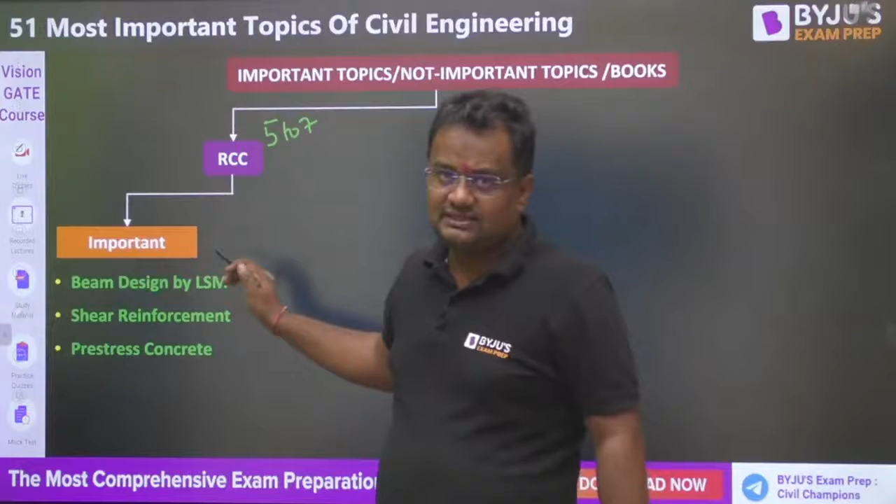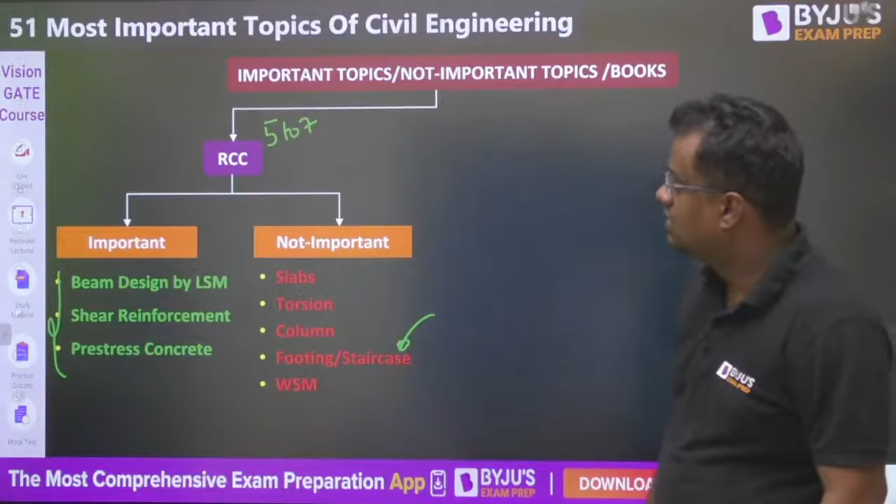Beam design, shear reinforcement and pre-stress. From last 12 years I have analyzed, the maximum number of times the question have been asked from these three. The topics which you can skip are slab, torsion, columns, footing and staircases, anyhow coming in engineering services mainly, and working stress method. Book you can refer is Pillai Menon.

For steel structures, the important topics are plastic analysis and connections. 70% chances that the question, if asked in steel structures, which is around 2 to 4 marks, will be coming from plastic and connections. Compression members and beams, chances are less, particularly in GATE exam. The book is none other than S.K. Duggal.

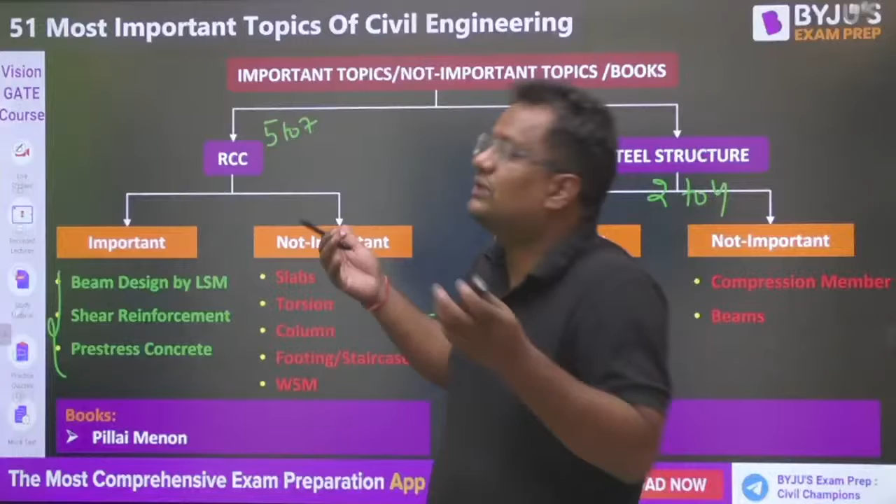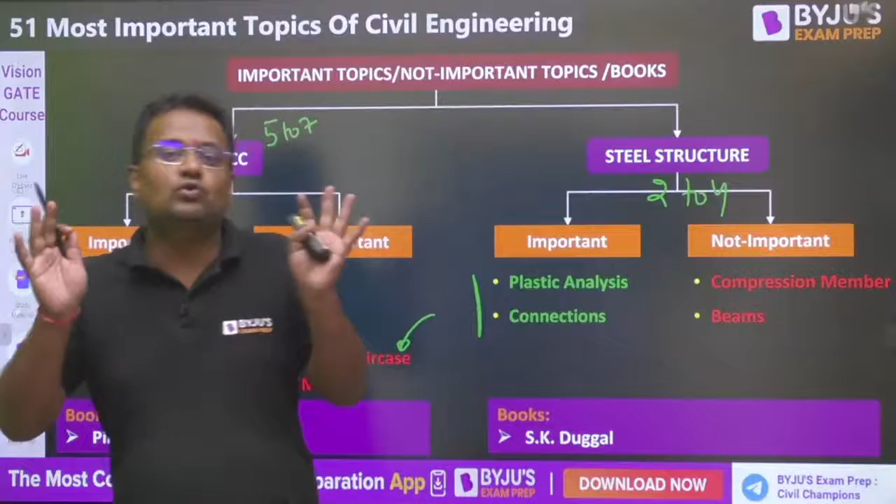Let me tell you, what is the benefit of this session, the important and not important topics. The benefit for two different types of students is different. First type, those students who have covered everything, who have completed almost their syllabus, they can focus more here. As they have studied all the syllabus, they have to focus here also, but they can focus more here, more practice, more revision here.

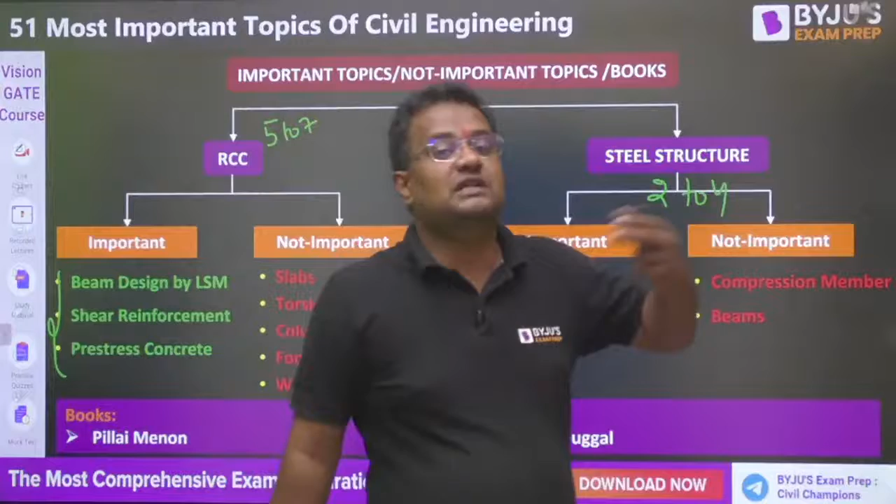Those students who are about to skip some topics or subjects can rely on the particular topics only. So for two different types of students, this can work differently.

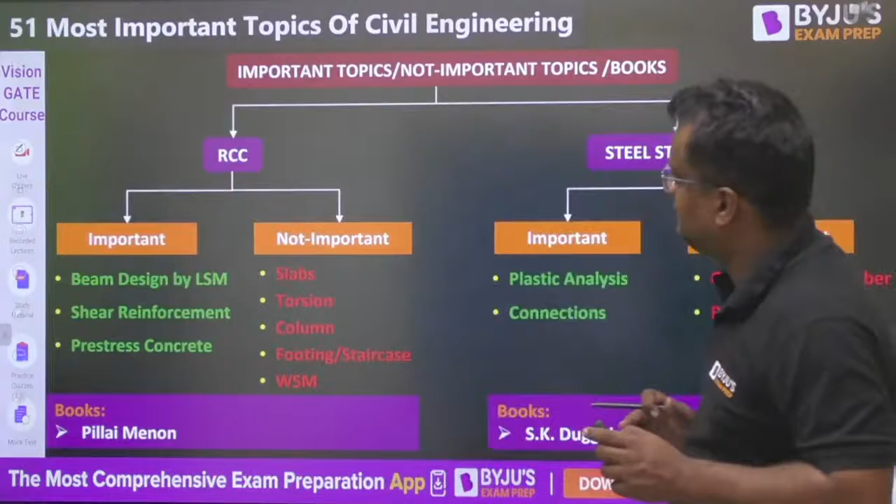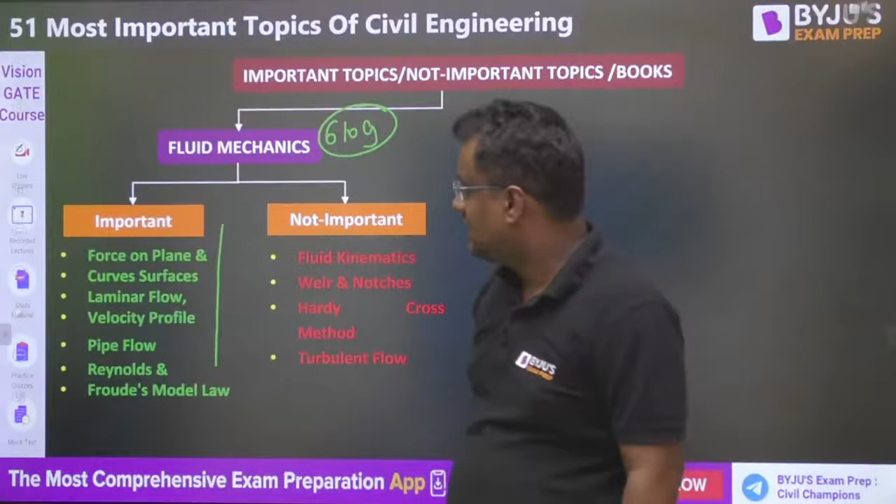Now guys, RCC and steel we have done. For fluid mechanics in civil engineering, it's around 6 to 9 marks including OCF, where OCF is around 3 to 4 marks and fluid mechanics is around 4 to 5 marks. Important topics are force on plane and curved surfaces, laminar flow, pipe flow, and Reynolds and Froude's model law, and the rest are not important. The book is Modi and Seth.

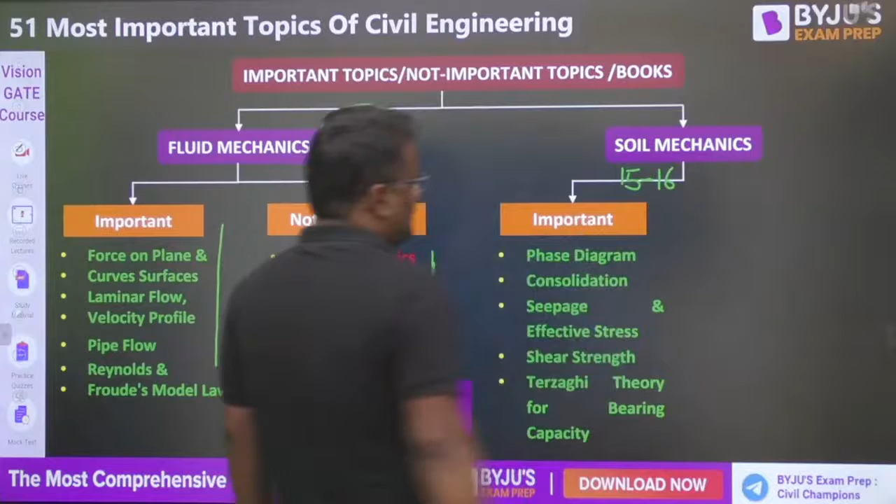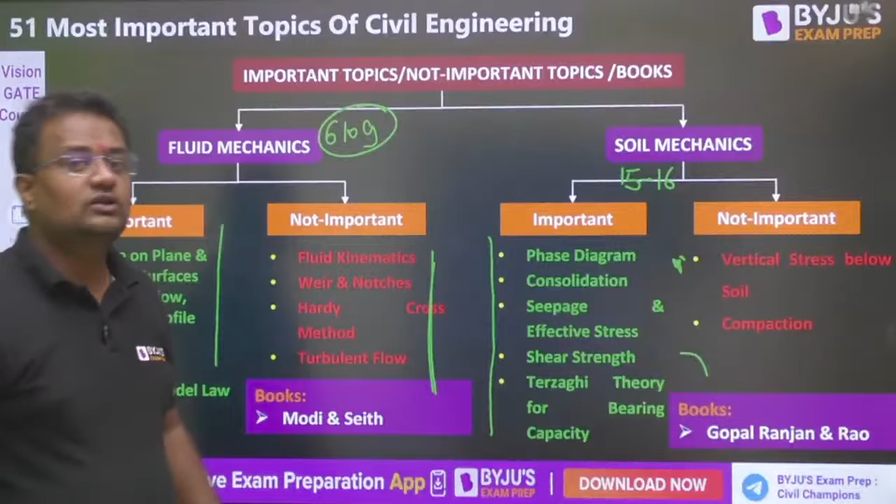For soil mechanics, which is the highest weightage of all civil engineering subjects, it is around 15 to 16 marks. The important topics are phase diagram, consolidation, seepage, effective stress, shear strength, Terzaghi, and bearing capacity for shallow foundation. Not important topics are vertical stress below soil, although in the last 3 years one question has been asked from this topic, and compaction - in the last 7 to 8 years they haven't asked questions from this. The best book is Gopal Ranjan Rao, because in many theoretical questions, particularly in Engineering Services and State Services examinations, the questions are direct copy-paste of Gopal Ranjan Rao's lines.

Now moving to highway engineering, which is part of transportation, coming around 9 marks, out of which 7 marks come from highway only. The important chapters are geometric design and traffic engineering. Pavement and hill roads are not that important.

Here the important topics are sight distance - SSD and OSD are equally important - super elevation, Webster method of signal design where C naught equals 1.5L plus 5 upon 1 minus Y, and capacity of highway for Greenshield's model, which assumes a linear relationship between velocity and density, that is VF into kj by 4. Not important topics are pavement design and length of vertical curve.

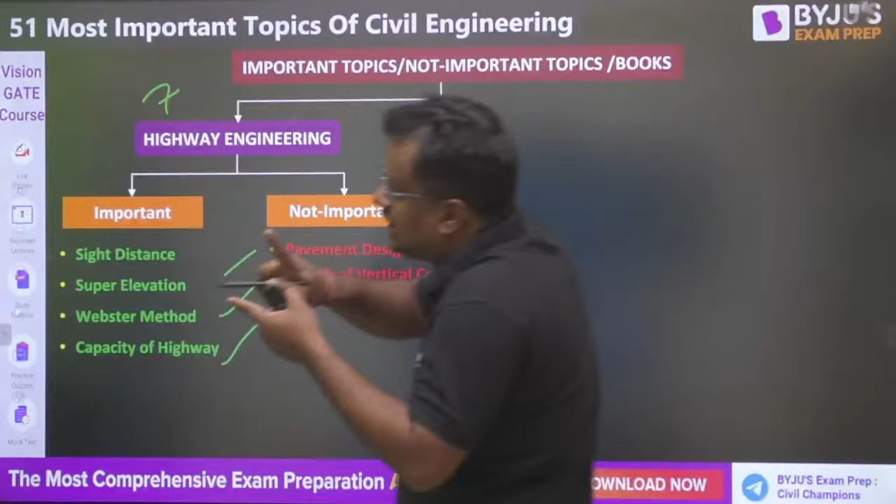From the geometric design chapter you expect a question from sight distance, you expect a question from super elevation, but compared to these, questions on vertical curve are less frequent and setback distance even lesser. Now guys, Khanna and Justo is the book.

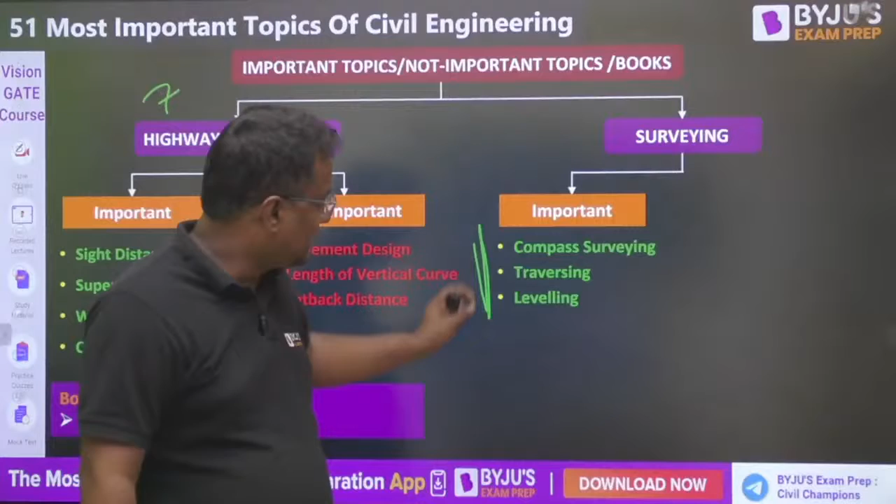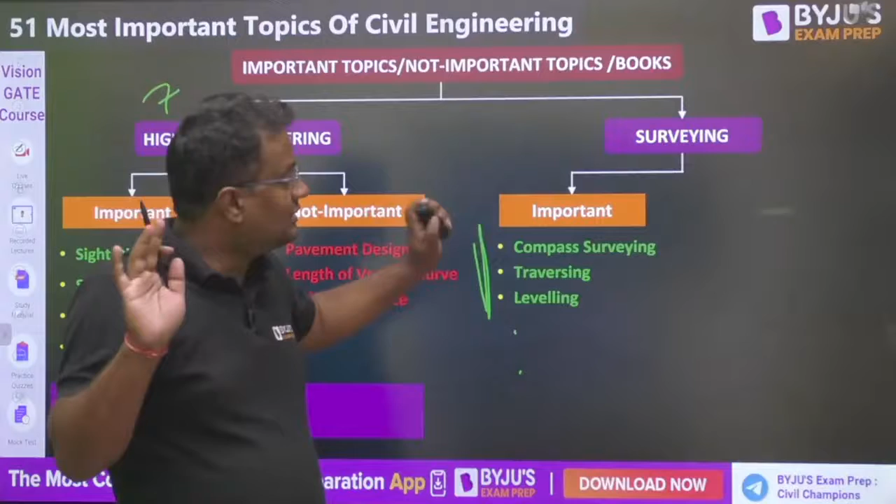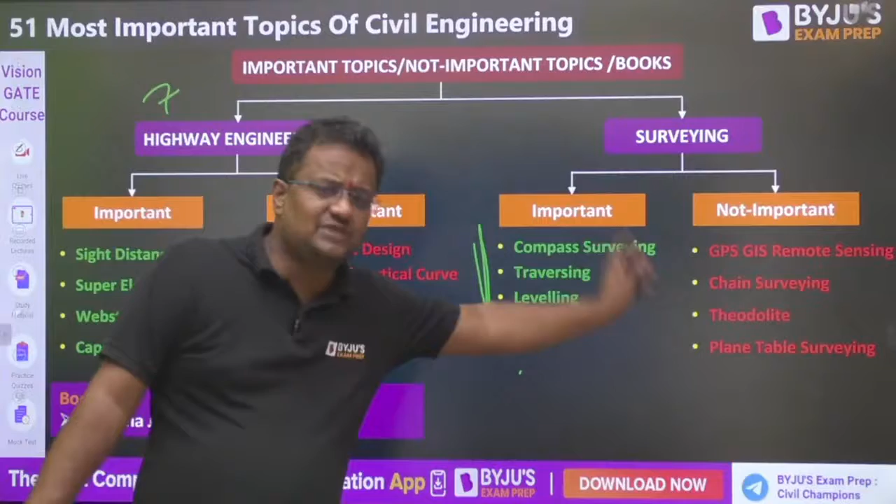For surveying, from these 3 topics - compass (declination and local attraction), traversing, and leveling - 90% of questions from last many years in surveying are coming. If I include photogrammetry and tachymetry, then it's around 99%. From all other topics, including chain surveying, rarely a question is asked. Chain surveying is asked in Engineering Services objective papers, but GATE is focusing on these only, and it's almost negligible from other topics. Surveying is very scoring, because in 5 to 6 days from zero level you can complete it, and it's worth around 5 to 6 marks in the GATE examination.

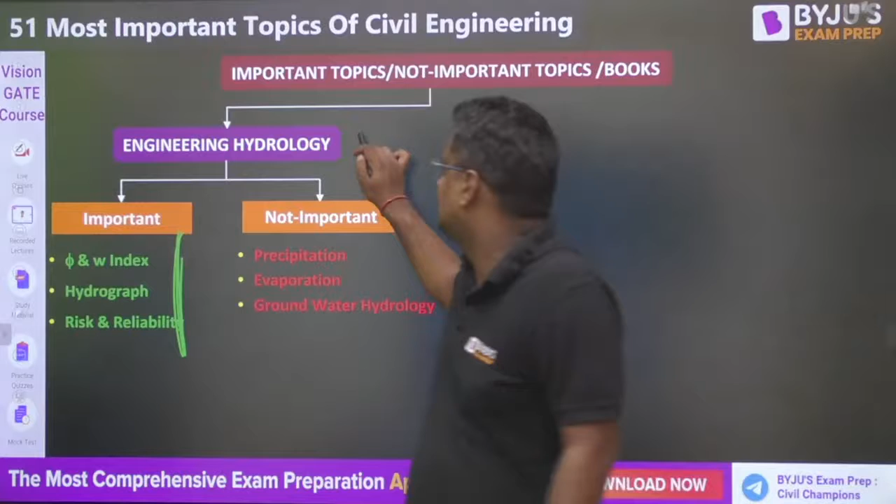Book is BC Punmia. Engineering hydrology guys, from these 3 topics - again like surveying, very reliant on these 3 topics for a question. Rarely in the last 5 years have you had a question outside of this. Precipitation and evaporation - hydrology is always around 4 marks, and I teach the hydrology syllabus this way, which is my own way of teaching.

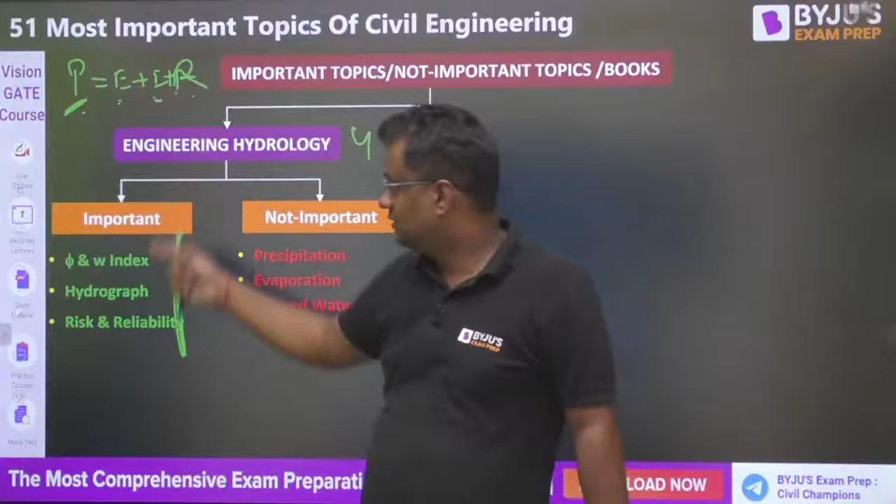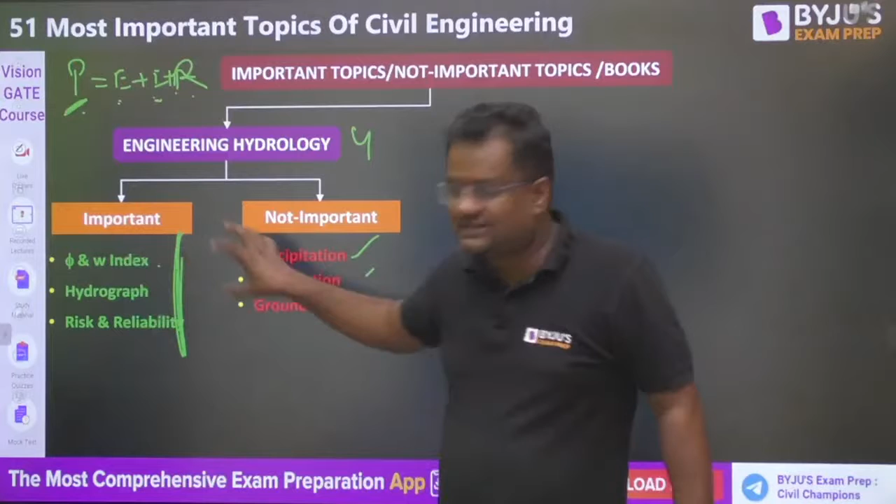P equals E plus I plus R: whatever precipitation is received by earth either evaporates, infiltrates, or runs off. Whatever water comes either evaporates, goes below ground level, or runs off on the surface. Out of this, I (infiltration) and R (runoff) are important for GATE. P and E, precipitation and evaporation, are not that important especially for GATE exam. In IES exams more questions come from here, but still 2-3 objective questions come from this part too.

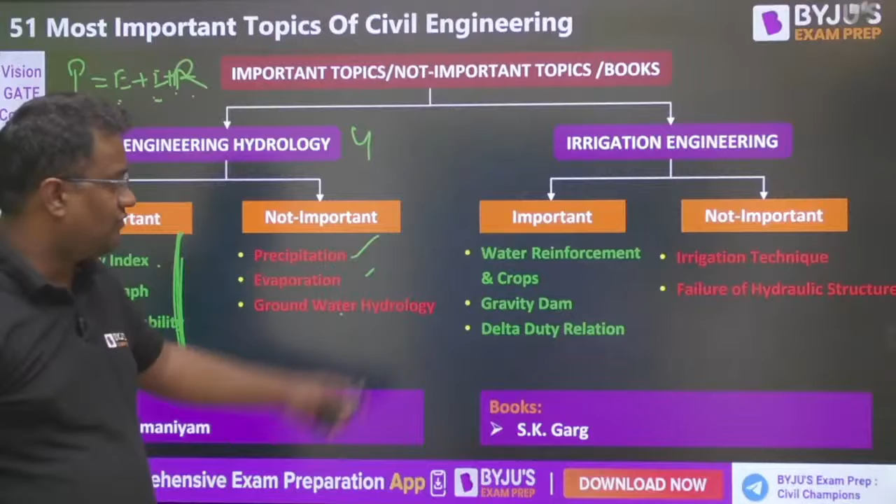Book is Subramaniyam. For irrigation guys, the important topics are gravity dam, water requirement of crops, delta duty where delta equals 8.64B by D - still remember this from B.Tech - irrigation technique, and failure of hydraulic structures. Book is SK Garg.

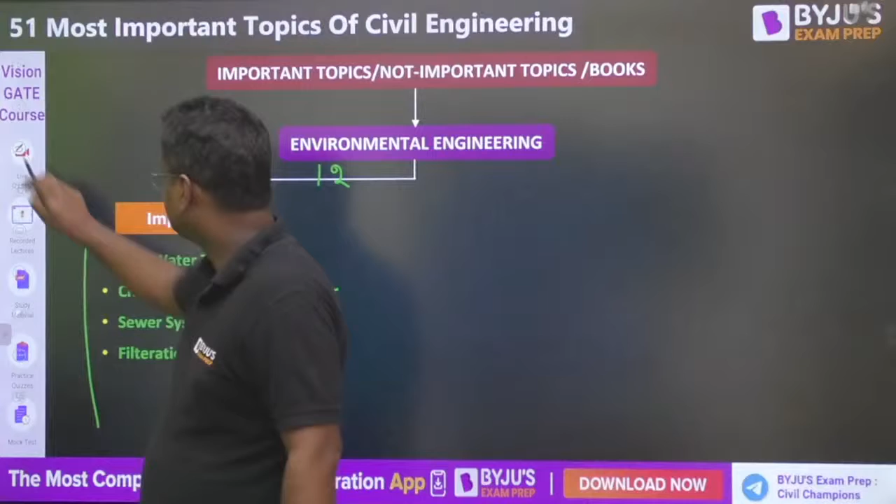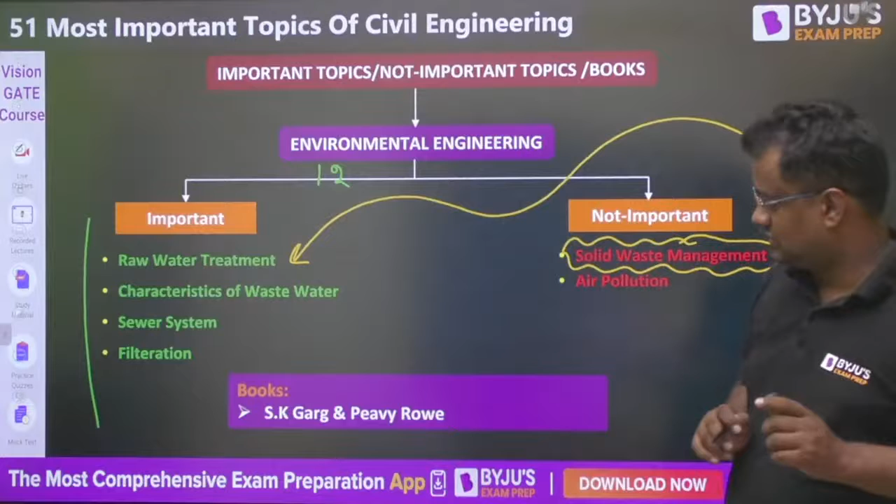Environment guys, again a heavy subject, around 12 marks of questions are asked from here. Raw water treatment, characteristics of sewage, sewer system, filtration, sedimentation - all those are important topics. Solid waste management was not important earlier, but now you can shift it here, because in the last 5 years, 2 to 3 times questions have been asked from here. So you cannot consider it either important or unimportant - now it's in the mediocre range. And air pollution.

Now I am going to the topmost topics. This is not the topmost among 51 topics - before that, SOM is missed here. For SOM, let me tell you, from the last 3 years, every year there's 1 or 2 questions. One question definitely comes, sometimes even 2 questions come. Every year 1 or 2 questions are coming from transformation of stress.

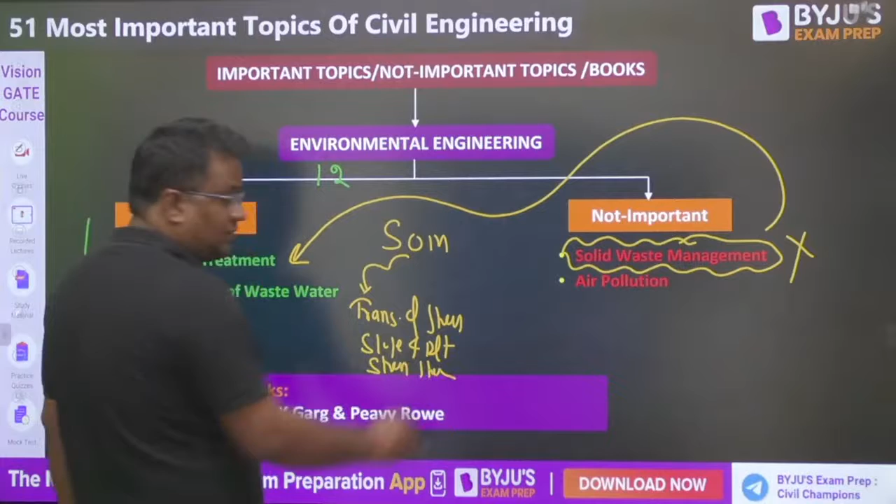Transformation of stress, that Mohr circle chapter is very important. Slope and deflection, and first chapter stress strain, which includes stress strain curve, properties of material, deformation of bar, Poisson ratio, and thermal stress. And for structures, guys, the important is ILD, truss, and determinacy.

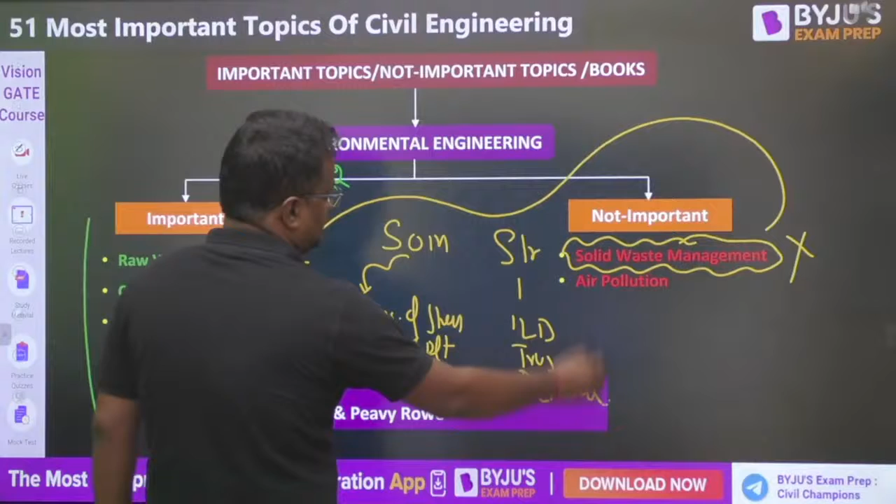Everybody, topmost. Now I am telling these subject-wise, on the priority wise, guys. So the first topic, the most important topic of civil engineering, I can say, is SFD BMD.

In fact, guys, you might not be expecting a direct question from SFD BMD, that draw the SFD for this beam or draw the BMD for this beam. But in GATE examination, in those 65 questions, you will be facing 3 to 4 questions where SFD BMD will be used directly or indirectly. Might be in bending stress chapter, might be in slope deflection chapter, might be in RCC, might be in steel.

Might be in finding the shear stress at any point, shear stress distribution. So it is not asked directly in the GATE examination as draw the SFD BMD, but still in 3 to 4 questions out of 65 questions, this topic will be used indirectly. So this I have considered as the most important part.

The second is compass survey. Every time the question is coming from surveying, and 5 to 6 mark survey question is asked, and every time the question is from compass survey, either of local attraction, either of bearing or declination, or combination of declination and local attraction.

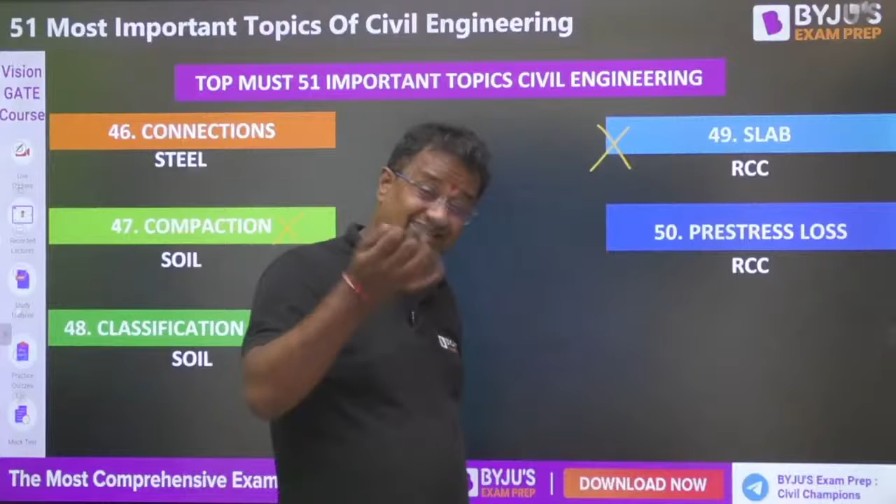Now, the first 30-35 topics are important, after that not as important. Classification of soil, slab from RCC - again not as important as other topics. Then prestress losses and slope stability - again these are all low priorities.